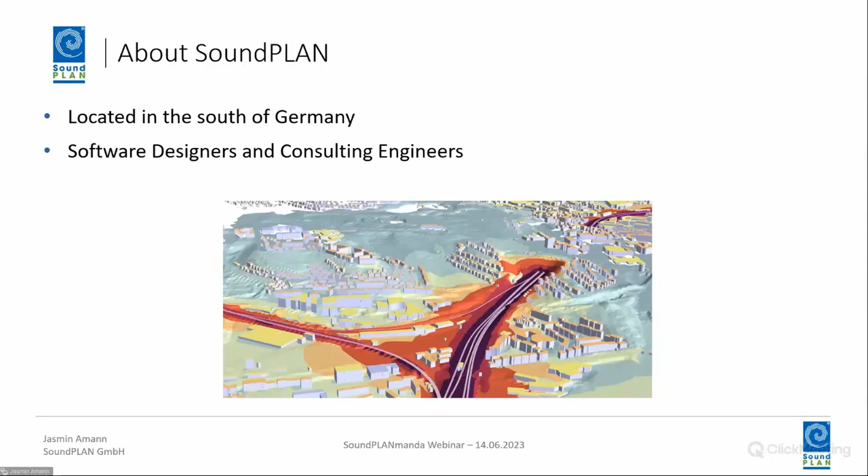SoundPlan offers different software products. First of all, SoundPlan Noise, it's our all-rounder. Then there is SoundPlan Essential, like the little brother of SoundPlan Noise, for beginners. Then we have Saruma, the software for room acoustics. And last but not least, what we are going to look at today, SoundPLANmanda, the mapping and analyzing software in the field of occupational health and safety.

So I would like to give you an introduction to occupational health and safety. It is well known that too much noise in the workplace is harmful. Too much noise leads to hearing damage in particular.

Studies show that high levels of occupational noise are not unique. The problem exists in all regions of the world. For example, in the USA, more than 30 million workers are exposed to hazardous noise. In Europe, 25% to 33% of the workforce is exposed to high-level noise at least a quarter of their working time. In addition, noise-induced hearing loss is the most common occupational disease.

So, what are the problems and consequences of noise-induced hearing loss? It is a result of long-term exposure to noise. The problem is that it is chronic and irreparable damage. This means noise-induced hearing loss cannot be cured.

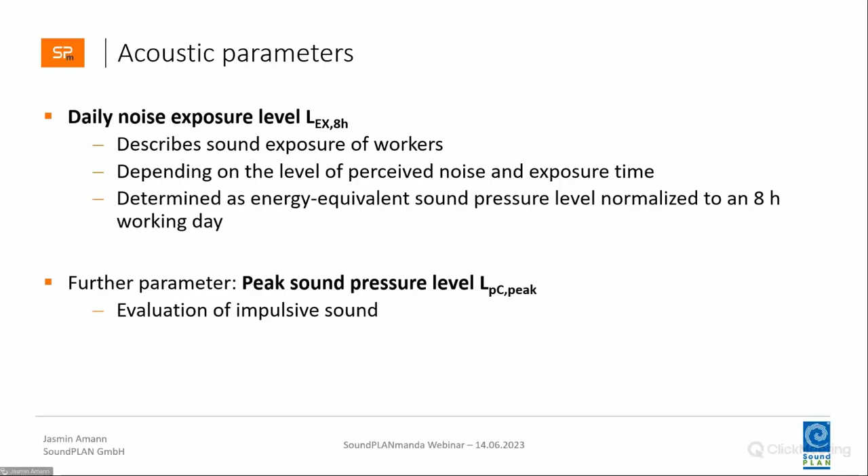So, like everywhere, there are different legal regulations in different countries. For example, in Europe, there's the Directive 2003/10/EC. In the USA, there are some more regulations, for example the Department of Defense Instruction or the National Institute for Occupational Safety and Health.

There are various regulations around the world. Some of them are listed here. And the application of the regulation depends, of course, on the country in which the risk assessment is carried out.

For example, I would like to show you the trigger values of the Directive 2003/10/EC. There is the lower and the upper exposure action value for the daily noise exposure level and the peak sound pressure level. The EU directive also defines an exposure limit value. And if the trigger values are exceeded, measures must be taken, for example the wearing of hearing protection.

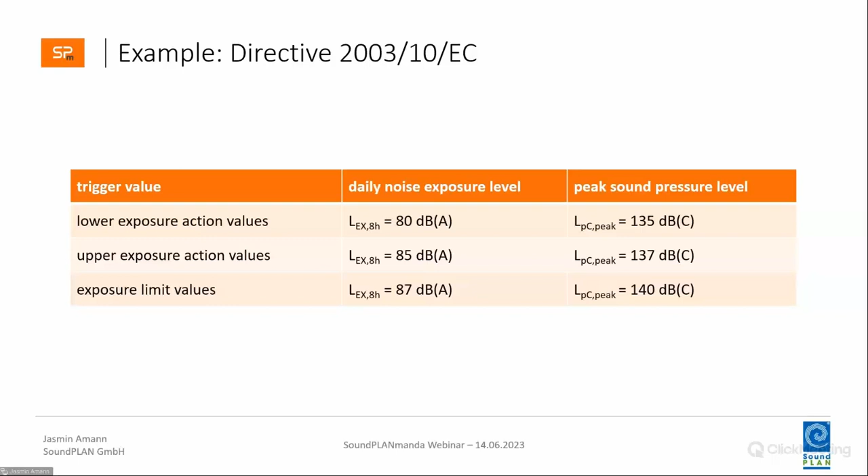So, we have learned so far that excessive noise exposure in the workplace can have serious health consequences. Exposure to high levels of noise for too long can lead to noise-induced hearing loss. Only when it is known that employees are exposed to too much noise can effective measures be taken. There are also legal requirements for compliance with the noise exposure level, and therefore an assessment of the existing noise exposure is mandatory.

So for the determination and assessment of noise exposure, there is SoundPLANmanda, the mapping and analyzing software. SoundPLANmanda is our new mapping and analysis software in the field of occupational health and safety.

The basis in SoundPLANmanda are classical sound pressure measurements. The measurement data can be easily imported and several measurement data can be offset against each other. For example, the mean value from several measurement data can be formed. However, these measured values do not say anything about the noise exposure of an individual employee.

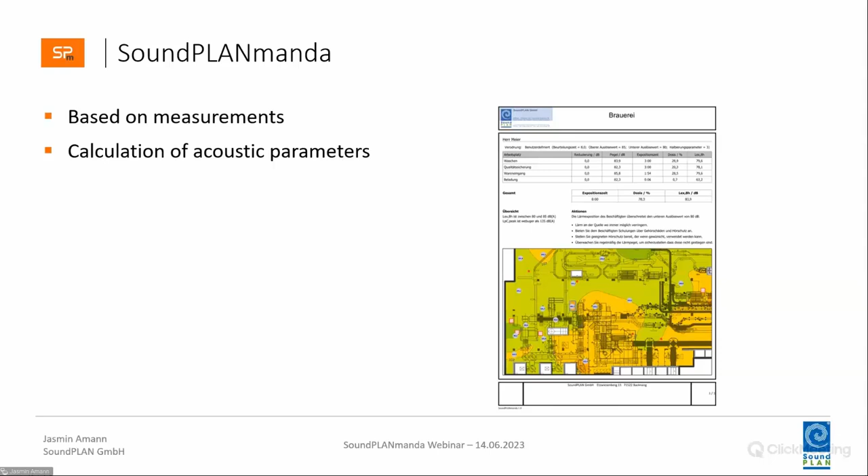Based on these measurements, SoundPLANmanda determines the acoustic parameters such as the daily noise exposure level. The noise level distribution is clearly presented in colored noise maps, and the size of the mapping area is not limited. It can be a small room, a large hall, or an outdoor area.

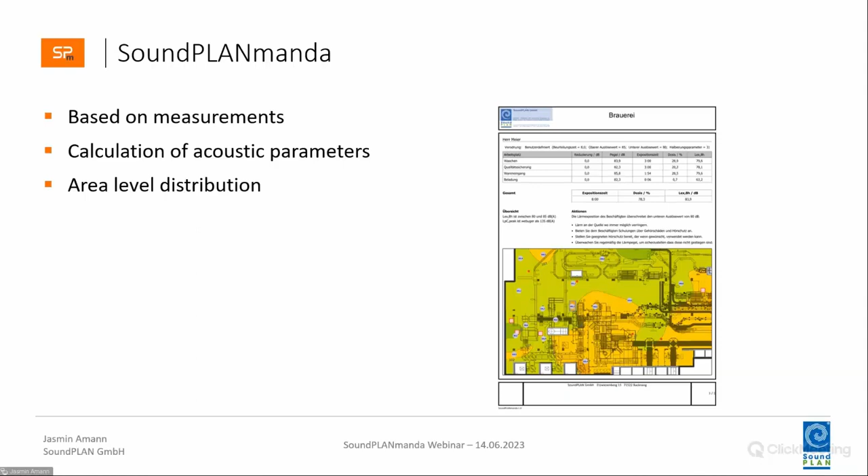SoundPLANmanda can also be used to perform a risk assessment for each individual employee. The risk assessment can be saved as clear documentation and easily presented at any time during an audit. Depending on the guideline used, appropriate measures are recommended for correspondingly high exposure levels and are listed in the documentation.

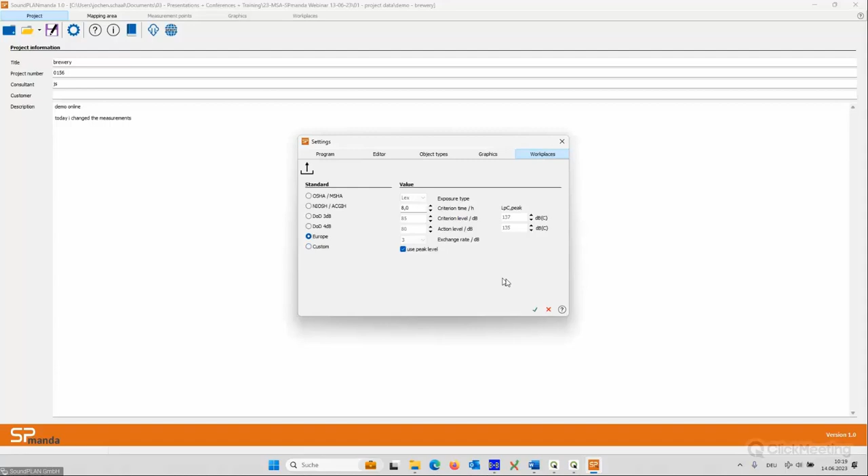So this would be the setting we are using here in Germany. We have criterion level and action level, and also for the peak value, so for the LEX and for the peak value. If you find nothing fits to your setup, you can create your own custom setup and adjust basically all the levels or the settings to what you want to use. So SoundPLANmanda should be usable all over the world if you have different setups.

Then we have the help. Everywhere in the software you can open the help. You can go through the information here in the HTML help. This is also sensitive to where you are in the software. So if I go back to the settings and open here the help, it will directly jump to the settings here and give you information about the settings window.

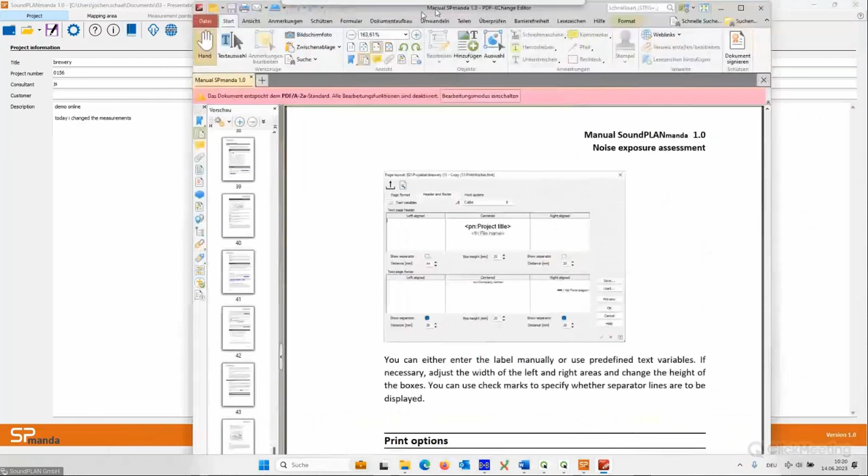Then we have an info splash screen giving you the information about which software version is installed, also the license file and things like that. And the next one would be the manual. So there's a manual available in PDF format. You can load it directly here from the software, read through it, print it, whatever you want to do.

Then we have two buttons related basically to the internet. The first one is updates. So you can check here for updates and news in relation to SoundPLAN. So if there's a new version, you could download it here. Interesting is also the bug fix history, so you can directly see what are the changes that happened in the software over time. And the last one would bring you to the SoundPLAN homepage, where you can find more information about our other software products, trainings, and things like that.

Okay, let's start with the real work. So then I changed the tab sheet here from project to mapping area. And now we have here on the right side our working area where we define the mapping area. Such a mapping area could be any area. It could be inside of an industrial site. It could be outside, it could be one room, it could be a whole industrial building, whatever. So basically you're completely free. It's just defining the boundary area of the mapping.

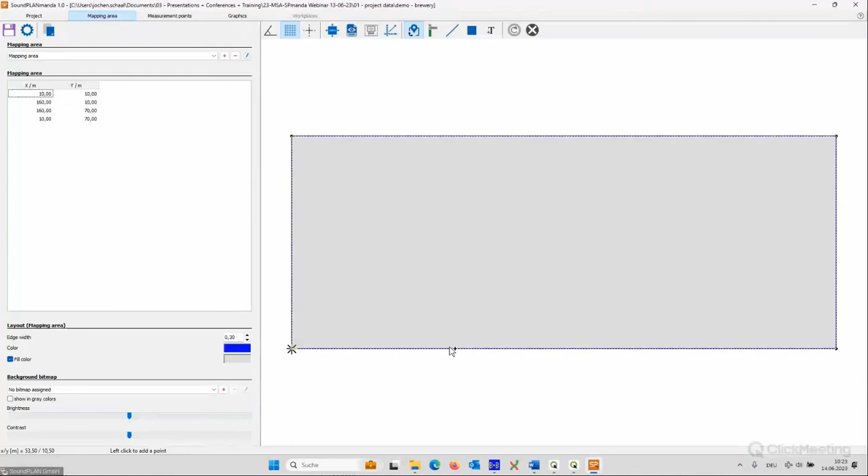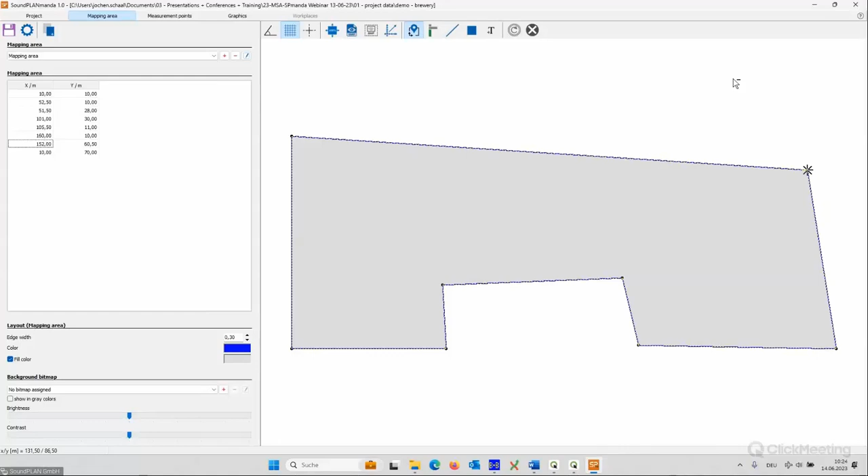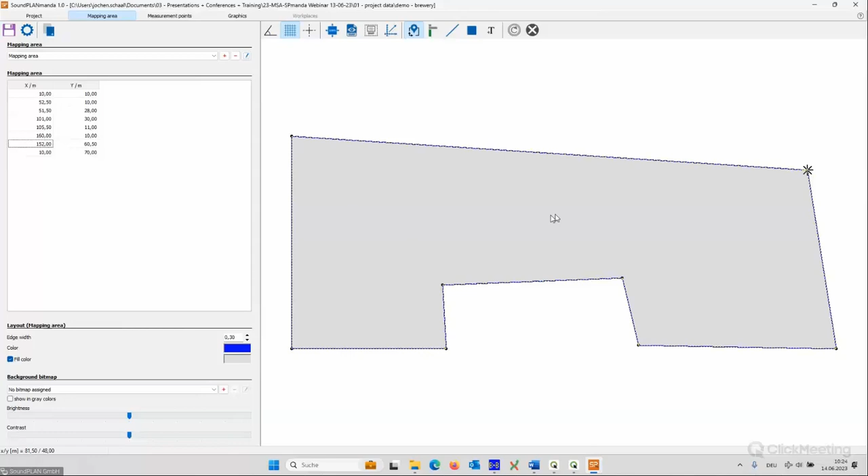You could always add coordinates or delete them if you want to do that. That's very simple. So you just go into the line and say, okay, I would want to have an additional point, maybe another additional point, and now you can start moving them around, add more, and introduce them however you want to do that. Of course, you can also move around the original points. No, that was introducing a new one, so I delete that one. Deleting is also possible, you just press the Shift key, and now you can delete it. So it's very simple to change the layout of your mapping area. And this table with the coordinates helps you to keep track of the coordinates, the values of the coordinates. So you not only have the graphical, but also the tabular information over here.

Then we have the possibility to change the layout. So you can change the width of the border of the mapping area, of the edge. You can do that here by those small arrow keys, or you just use the mouse wheel up and down to change the values of the width. You can, of course, change also the colors. You can either use the predefined colors from SoundPLAN, or you can use this extended function to create your own colors. I will not show that now, so I just use a predefined one for the coloring of the edge line.

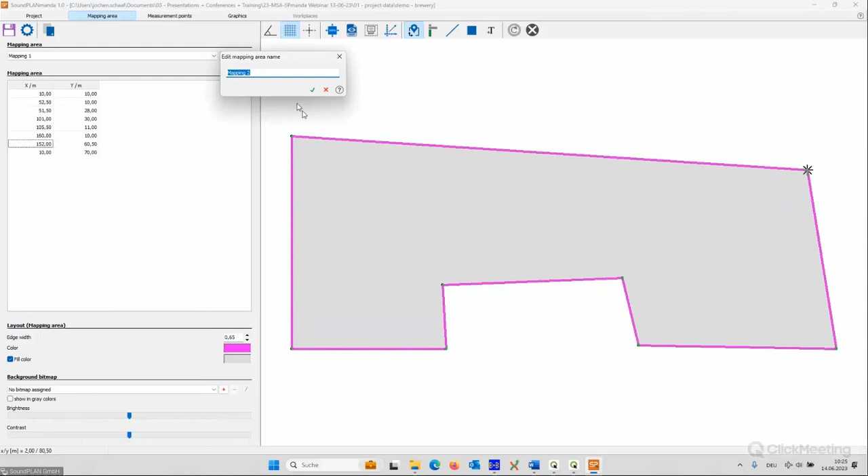Okay, that was the first option. Let's rename it mapping number 1, and then I save it. I create an additional mapping area, because in SoundPLAN there are no limitations. You can have as many mapping areas in one project as you want. So now I have a second one, and of course I have to enter the border lines as well.

To do that, I can use, for example, the grid mode. Okay, there it is. I used a very large coordinate range, so that's the reason why it took a while to show the grid. If I digitize now with the left mouse button, it will always catch such a grid point.

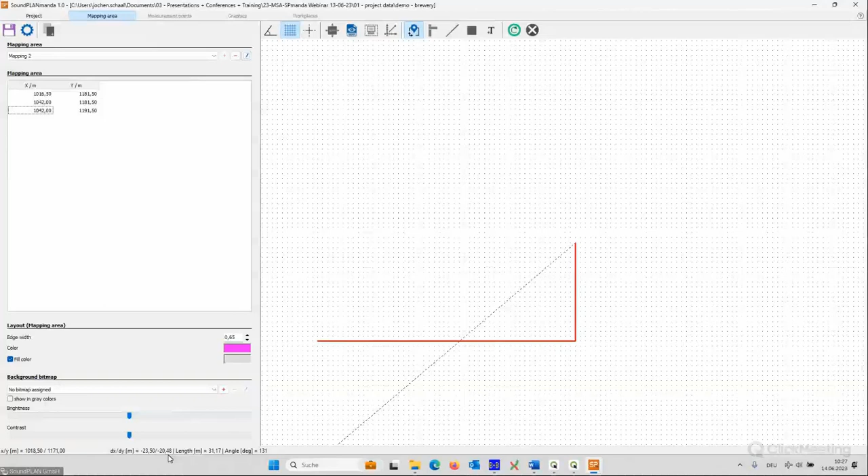Like this, it's very easy to define rectangular structures. Together with this information up here in the lower left, you can see the distance to the last point. So now the distance is 10 meters. Left click, I go upwards, and again 10 meters. Like this, it's very easy to digitize here in this grid mode.

But we not only have the grid mode, we also have angle mode. Now you can see I can only move in 15-degree angle steps, which I defined in the pre-settings, which makes it very easy to define the building or the shape of the mapping area. Together with this crosshair, I can also find other corners. Left click, and then maybe go down again, and then like that.

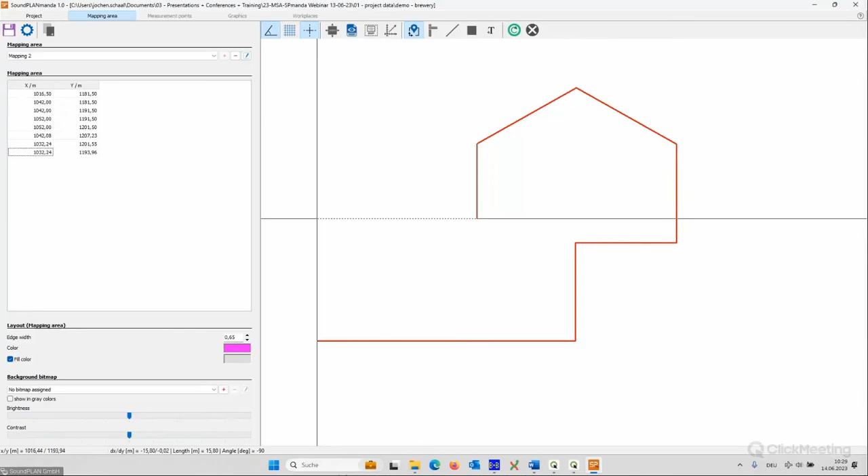Then you might want to place the last point and finish the input of the object. Then, as you have seen already, I moved in and out with the mouse wheel. Very easy. When I press the mouse wheel, I can move around. If I'm sometimes lost, you just click here on fit in, and it will fit the geometry into the screen.

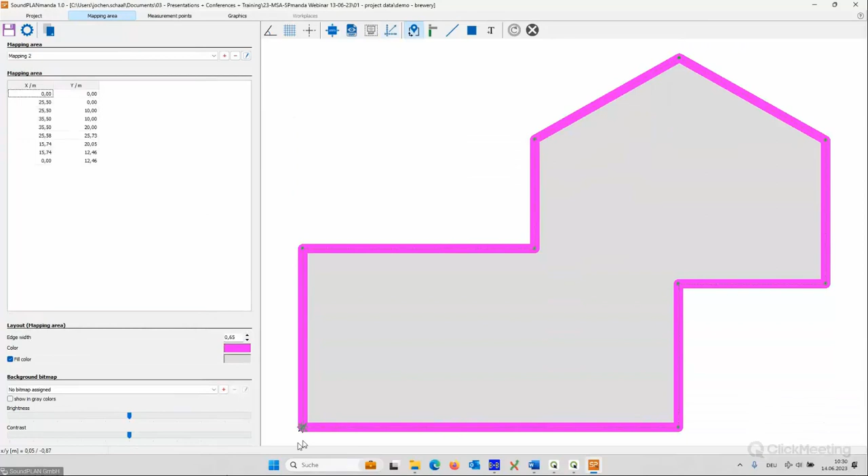Now I would like to show another function. At the moment this lower left corner is at 1016, 1181, and I would like to change the coordinate origin to 0, 0 for this point. We have a function for that, change 0. I just click here on the corner point, and you can see now it's 0, 0. Now it's much easier for me to define points afterwards inside the mapping area, which I have measured in the distance from this lower left corner point, for example.

Okay, let's continue to the last possibility for how to create a mapping area. Mapping number 3, I guess this is the most common approach. Now we will load a bitmap into the background and digitize the border of the mapping area on the basis of this bitmap.

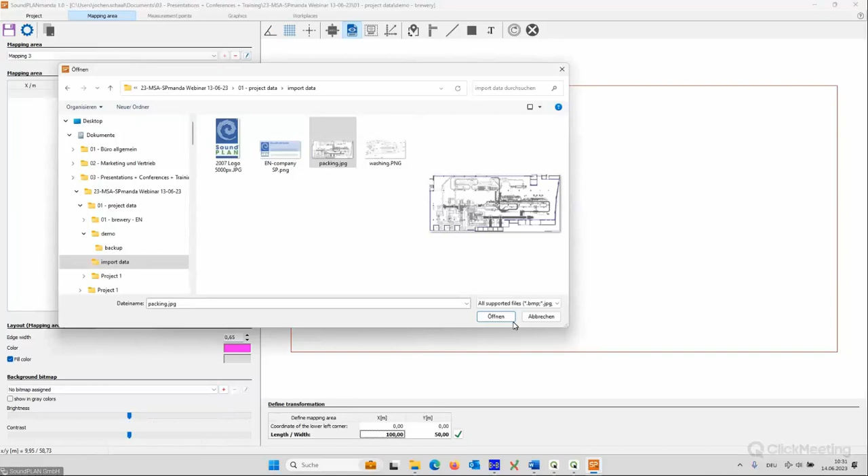So I press the button for the bitmap, go to a folder where I have some bitmaps, okay, select it. You can use JPEG, bitmap, PNG, TIFF, or PDF files. I already have a JPEG I want to use. I open it, and of course now I have to introduce some scaling, because otherwise the program will not know how many pixels is 1 meter.

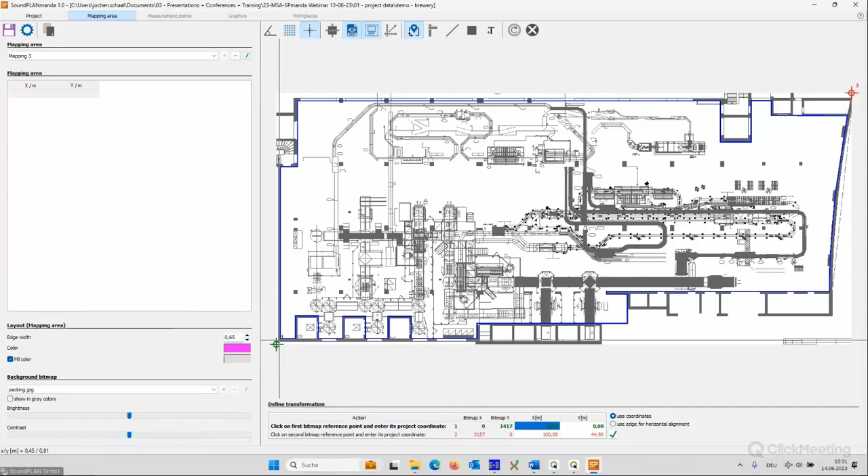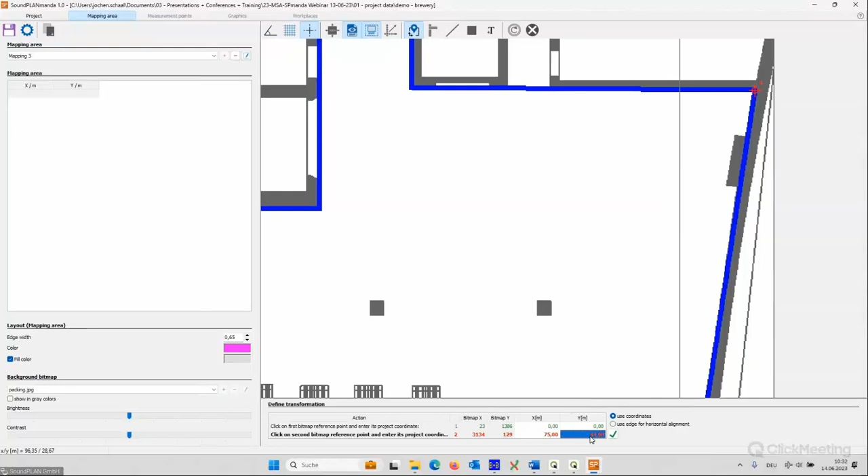To do that, I have to georeference the bitmap, and for that I have to know the coordinate information of some points of the bitmap. I have measured, or I declare this corner point down here to be 0, 0. Then I take another point, which I have measured in the bitmap, or know from the map up here. I know the distance from the lower left to this one is 75 meters in the X direction and 30 meters in the Y direction. So I've created now those 2 points to georeference the whole bitmap. If I press now the green tick mark, I accept the transformation.

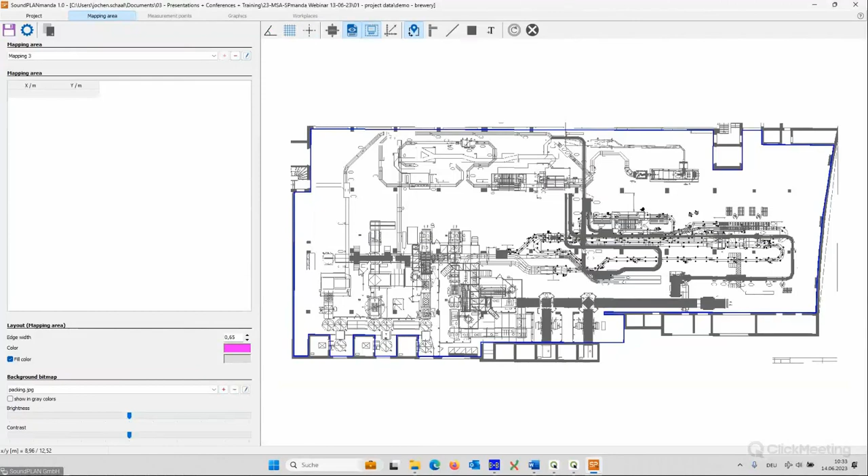Now if I go down here with the cursor, you can see, yeah, here it's round about 0, 0, and up here it should be 75, 30. Now I can introduce the border of this industrial hall. So I will start down here. Okay.

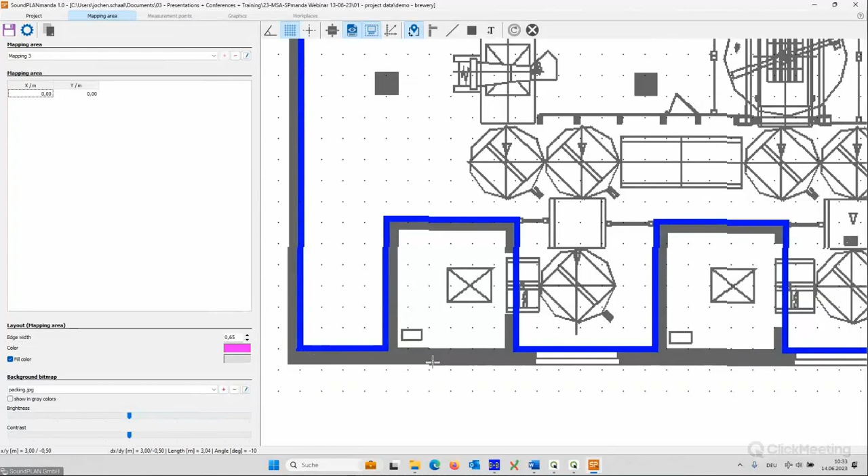And I will use the grid to snap to 0, 0. Okay, first point. And then I can snap the next point down here. Fits quite well, that fits also. Remember, I have just a 50 centimeter grid, so it will not always fit like here.

It doesn't match anymore. And then I just switch to the angle mode and continue to digitize the border of the room.

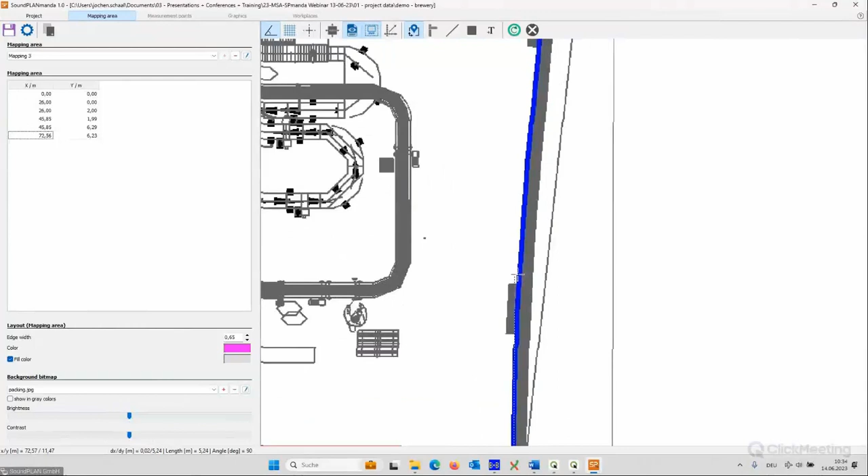Okay, now I'm still in the angle mode, and now it gets a bit tricky because I have the 15-degree angle mode, and it will not be possible to digitize this wall.

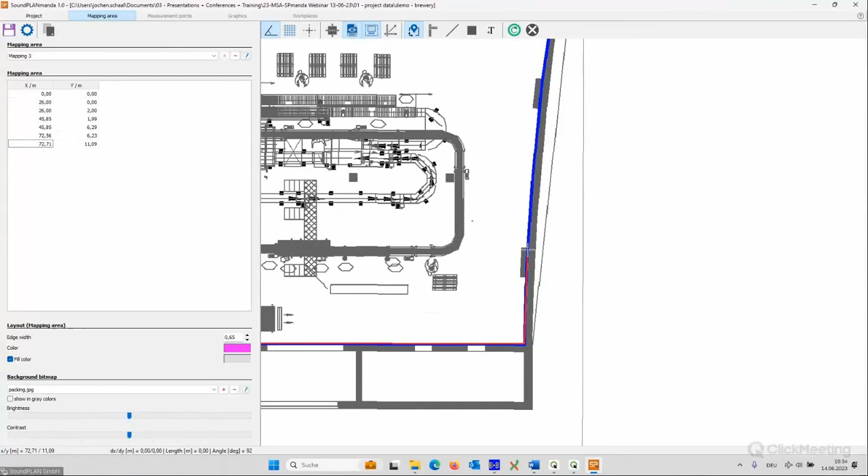So I could switch off the angle mode up here, but to make it easy for you as a customer, you can also press the Control key, and then it's temporarily switched off, and now I can follow the line here without the angle mode.

Oops. And now I release the Control key and I'm back in the angle mode, so only 15-degree steps are allowed.

And with a double click, it will close the mapping area. Okay, so very simple to define such a border.

Let me look if I forgot something. Oh, that looks okay, looks good. Then we have some options for the bitmap.

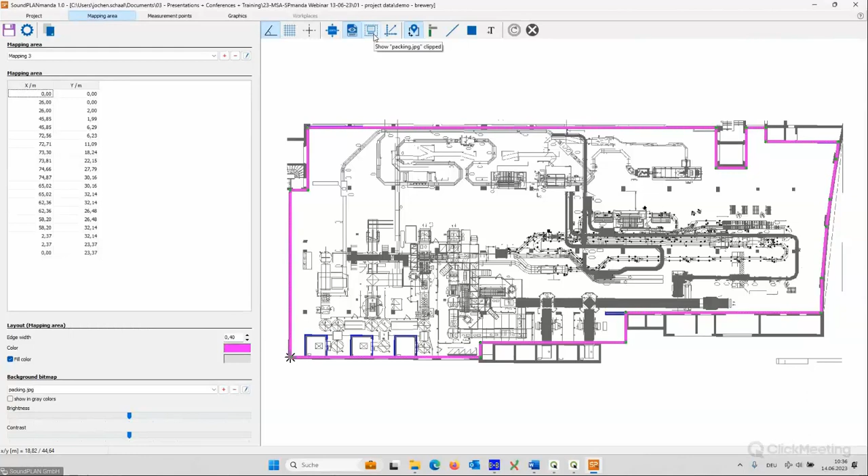I can hide it or show it. And at the moment, the bitmap is clipped to the border of the mapping area. If I want to see the whole bitmap, there's also a button to do that. I prefer to clip it. Okay.

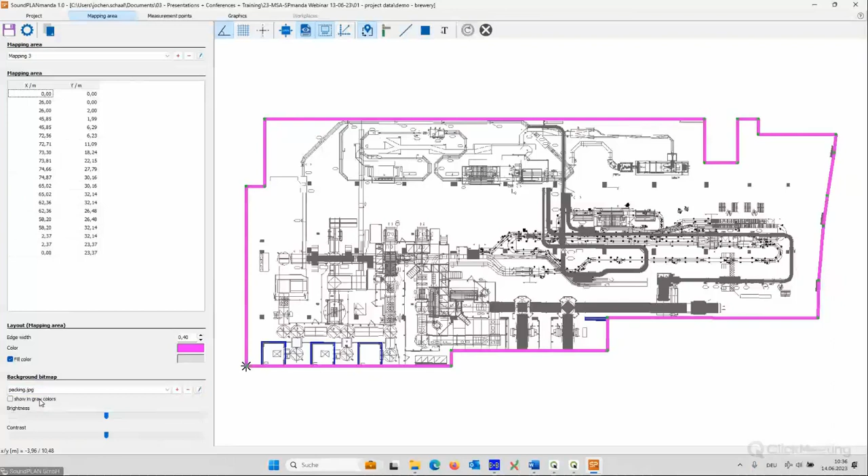Now, one last thing to say about the bitmap: you can change the appearance. You can show it only in grayscale. So I have a colored bitmap, you can see here some blue lines, but I only want to see the bitmap in grayscale, so I do that. And also you could change the brightness or the contrast. I will not adapt that, that fits quite well to my needs.

If you want to, you could add additional bitmaps, so you are not restricted to one. You could have multiple bitmaps you can load and use in your project. You can just add them here with the plus.

If you are unhappy with the georeferencing, the coordinate definition, you can change that later on by pressing this button and change it and do the georeferencing for the bitmap once more.

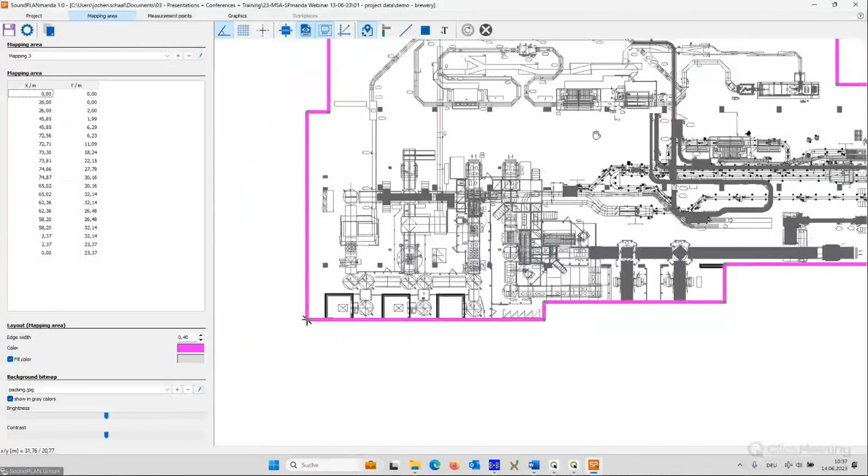Okay, now we want to introduce some additional walls inside the room. So for example, down here I have some separate rooms. I select here the object type wall. You can see here in the lower left corner, we have now the setup or layout for the wall. And defining such a room at the border of a building is very simple.

You just go to, for example, your upper left corner, press the... sorry, my fault, I delete the object. Yes.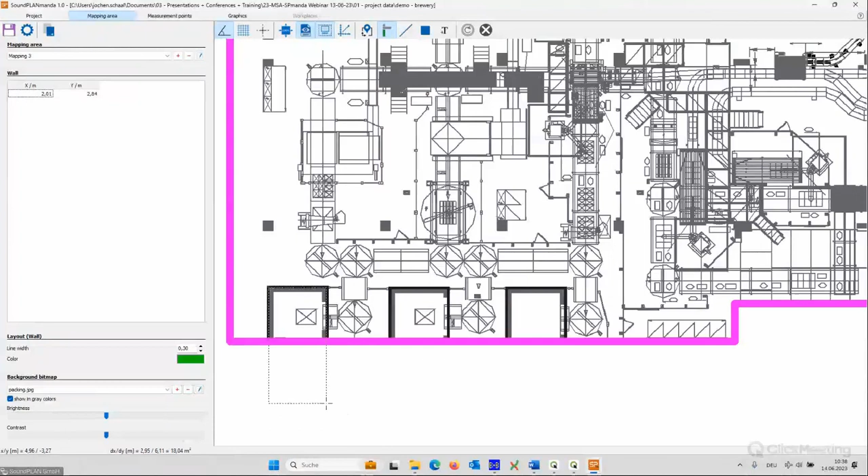Press the left mouse button, keep it pressed and pull open a rectangle, and then release the mouse button and it will clip the wall to the border of the building. So very simple to do that, you do not have to digitize all the points. Just pull open a rectangle and you will have such a basically closed room.

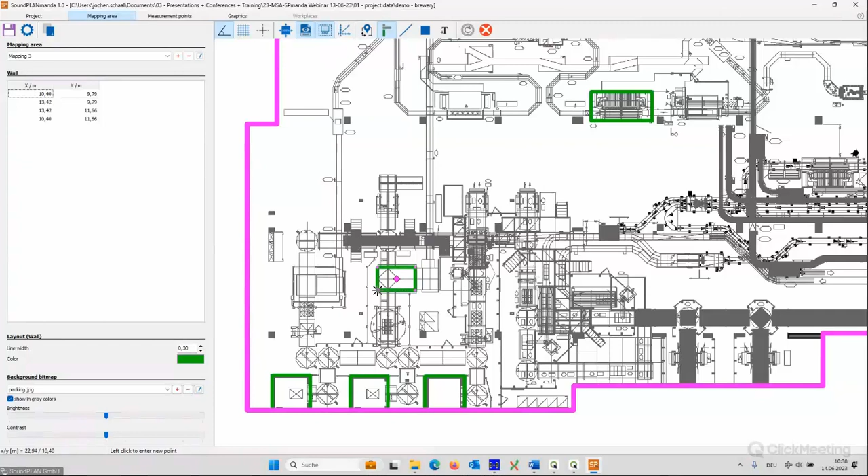Then you could say, okay, there's some large machinery inside of the building that I would like to consider also, to break up the noise field basically. So, for example, maybe this one, let's say that one as well, and maybe we have another one over here. But that's something you have to decide yourself when you did the measurements in the room.

And a last thing, I want to introduce here a wall freely standing in the room. So first point, second point, third point, and fourth point, and then I close the wall. So you can have, those walls can have 2 points, multiple points, can be a closed structure, whatever you want.

So that's all for mapping relevant objects, I would call it. Then we have also the possibility to introduce lines and areas just for graphical information.

So if I say, okay, I want to highlight maybe a certain line, I can digitize it here, and it will be displayed later on in the graphics and graphical output just for display purpose. So it will not influence the definition of the noise field.

Then we have an area object, so we could introduce up here maybe an area. I don't want to have a fill color, but maybe make the border a bit thicker and a different color, and introduce here a text inside. That seems a bit difficult - last time it worked without problems. So I place it here and call it rest area.

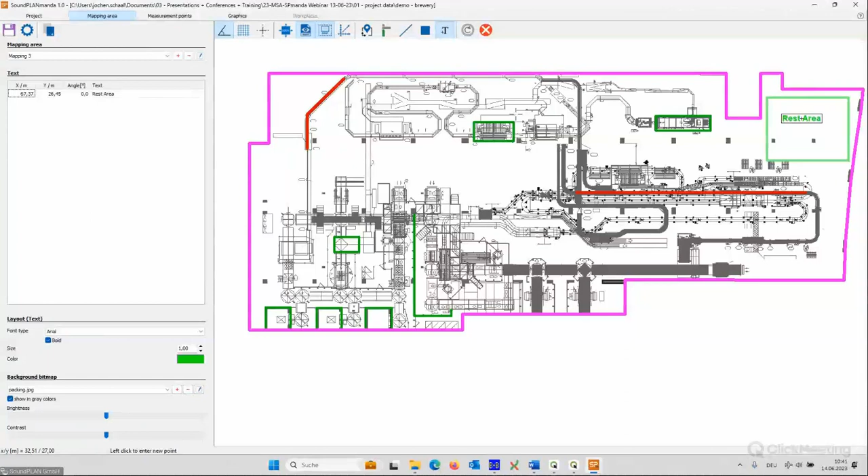Move it inside here. If I want to change the font type or make it bold, you can do that. Also change the size of it, and of course also the coloring. So maybe I use the same color as for the border line. Like that, you can create the interior of your mapping area - in this case, it's an industrial hall.

When you are finished with that, you continue to introduce your measurements, your measurement points. So we go on to the tab sheet measurement points. It creates automatically a measurement file where the measurements are stored. We can have multiple measurement files, not only one in a project - might be helpful if you did measurements during different days, or if you have measurements for different mapping areas.

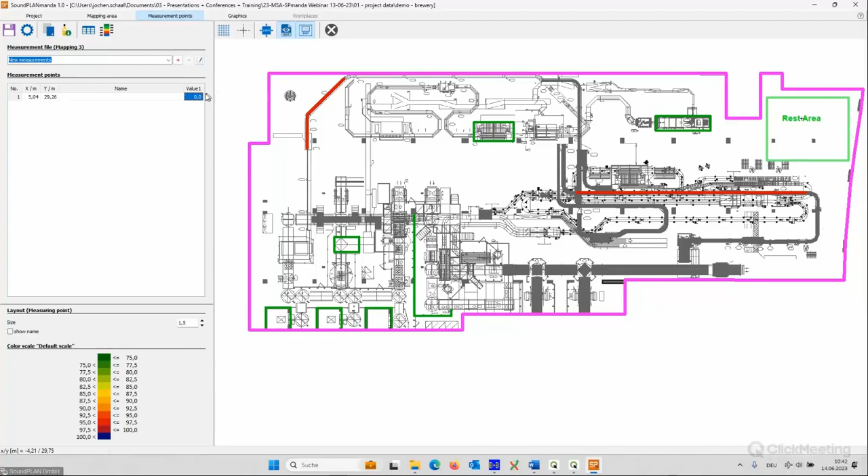So let's start. Let's assume we did some measurements, and the first one we did over here. I just left click and say, okay, value - let's say we measured 90 dBA. And then it colors the whole room with the color for 90 dBA, using a default dBA scale, which can be adapted to your needs, but that's the default.

And of course, then you should do multiple measurements in such a room. So for example, if we did the measurement over here, let's say we measured 85 dBA. Then it tries to color the room with the second value. But for such a large room, especially if you've introduced structures that break up the noise field, you need much more measurements. So let's say up here we have 95, and like that, you create the map for the measured room.

And also maybe 88. Well, this is how you can enter the values manually.

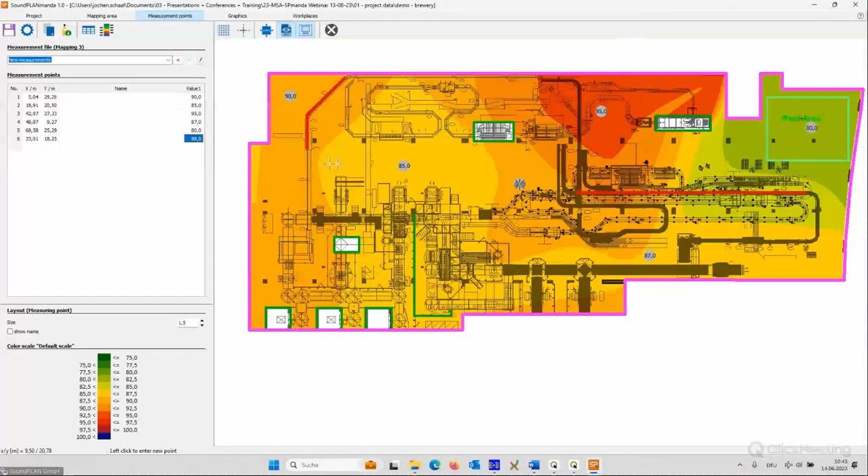It's helpful that we can see the cursor coordinates always in the lower left corner, so we can find the position of our measurement point. We can use the grid again, so you can snap to the grid, which might be helpful. And remember, in the settings, you could change the grid size to a smaller value than the 0.5 meter I'm using here at the moment.

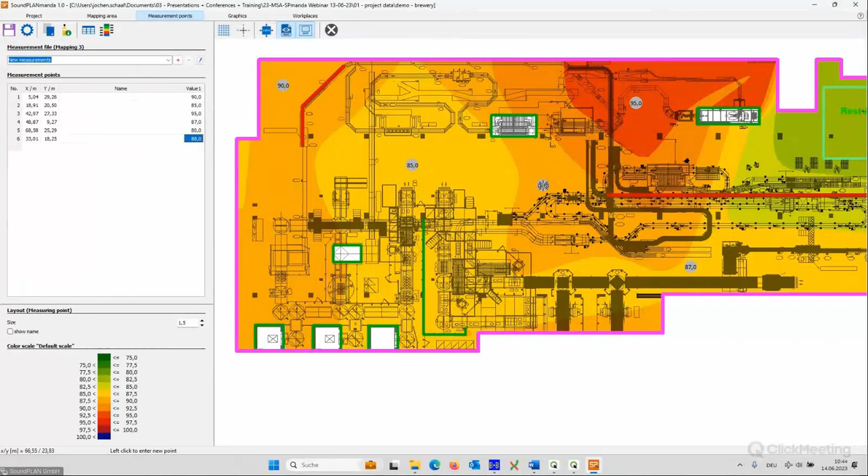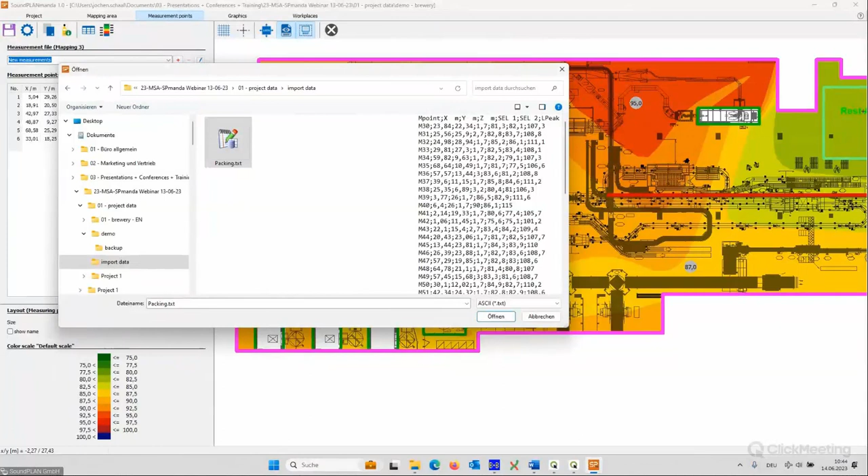But there's another possibility to make it easier for you - you can also import measurement data. We are importing simple text files, plain structure. The first line can be a kind of header, and then semicolon-separated measurement points, what you can see here in the file.

So we have a name, x and y coordinates, a height coordinate for the measurement point, and then 3 measured values - SEL1, 2, and an L peak value. Such a file you could generate easily in Excel. So if you did the measurements and documented them in Excel, you could export it as a text file and then load it into SoundPLAN manda.

So I open now this text file. There's also a preview again, so you can understand the contents of the text file. So we have a header, number of title rows is 1. And then we have to assign the columns of the file to the information in SoundPLAN.

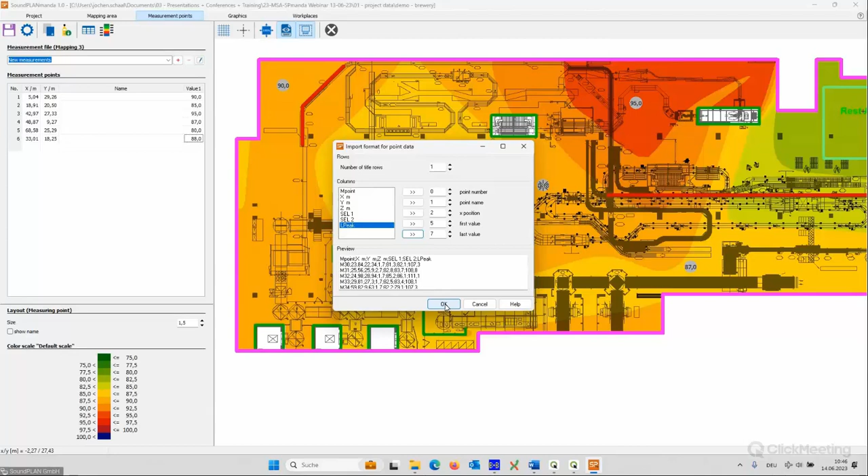So we have a measurement point name, which we assign here to point name in SoundPLANmanda. Then X position is column number 2. And the first value is SEL1, and the last one is column number 7. So very simple to assign such measured values to the structure in SoundPLAN. When I press OK, it has imported the measurement data.

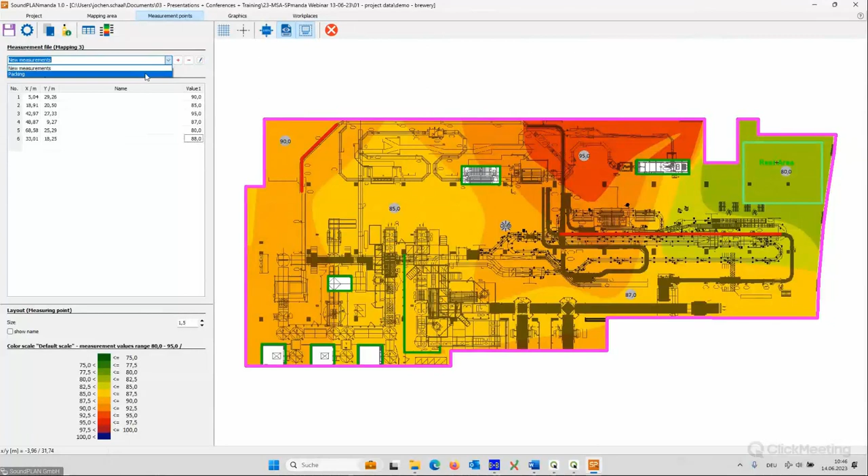You can see it has created an additional measurement file. That was the one we entered manually, and now there's a second one called packing, which is the name of the text file. So it used the name of the text file as naming.

And this is the result for it. Now you can see it gets a quite nice noise field for the room. I think you shouldn't measure too few numbers of measurement points, like this you can get a nice looking picture, so you need quite a lot of points for such a large room.

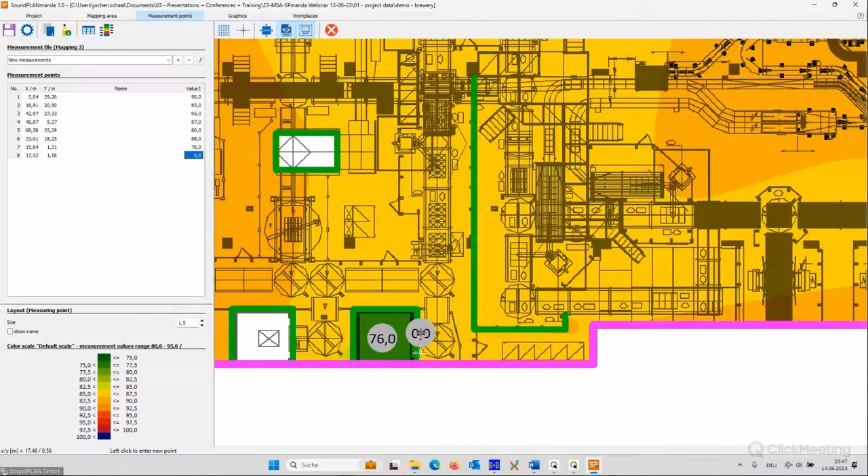One thing I'd like to show, if you have such an enclosure, and you might have one here too, let's go back to the other one. I don't want to destroy this one. If you have a measurement point in here, and let's say you measured 76 dBA, you can see such a wall is really breaking up the noise field. It's just coloring inside here of the enclosure with the 76, and the rest outside stays as it was before.

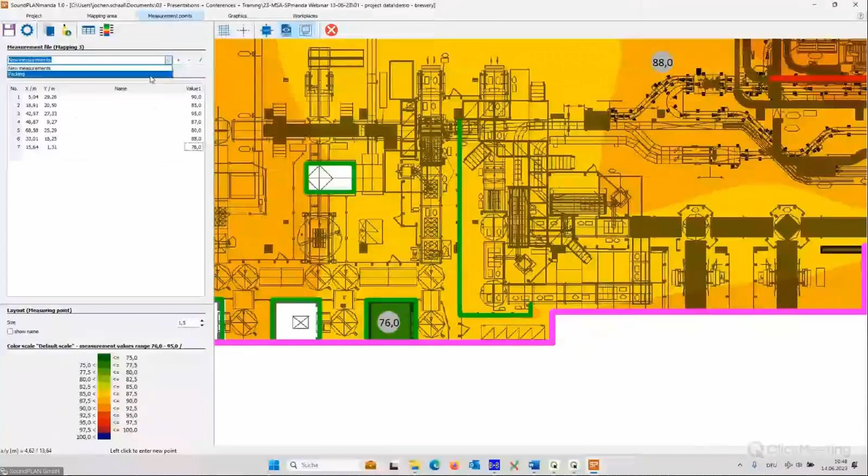Okay, let's go back to the imported measurement file. So what do we have? We have imported multiple measurement points with names which came from the measurement file already. Then we have imported 3 values representing 3 different measured values: 2 LAeq values, SEL1 and SEL2, as they are called in the measurement file, and a peak value.

For the SEL1 and SEL2, the default scale makes sense. For the peak values, which are much higher, the default scale doesn't make sense, so I might want to change the scaling. I can do that. Let's say we start at 90 and use 2.5 decibel as interval.

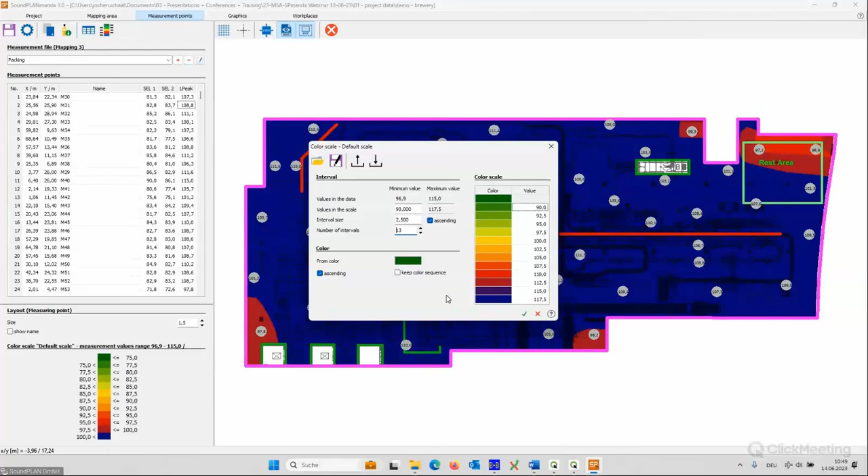Well, the rest seems reasonable. If I want more than 12 intervals, I can change that too, so now I would have 13, and it automatically sets the colors. Of course, you're completely free, so if you'd like different colors you just left click here and choose... now I did it, should change the color. So now I should not overwrite the default scale, but save the new color scale as, let's say, peak.

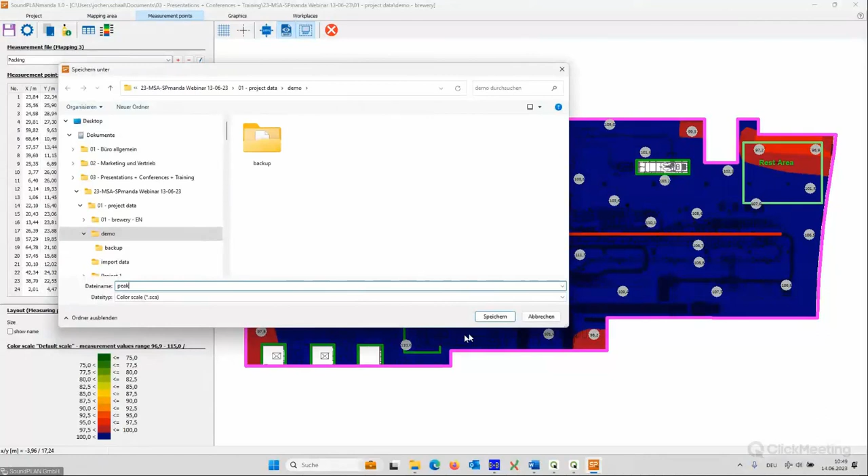I can see here we have a color scale peak, which is assigned to the column peak, and for the other ones it's still using the default scale. For SEL1 and SEL2, it's still the default scale. And if I go to the peak values, it's using now the new color scale peak.

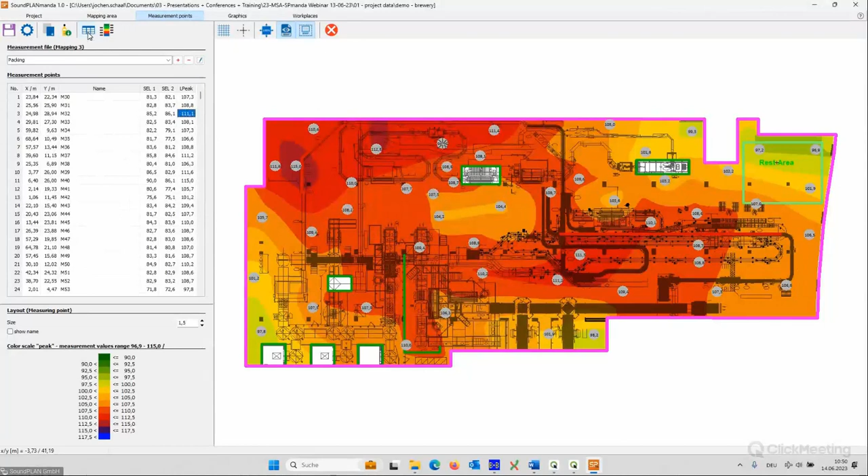Okay, let's dive a bit more into the table structure here. If I click on this button, I can edit the measurement table setup. You can see we have by default always a number for the measurement points, X, Y, Z, and the name. These are default columns, I cannot change them or delete them.

And then I have the imported SEL1 and SEL2 and the peak value. Something's missing because the software doesn't have the information yet, which is the unit. So I could enter here the units. The peak is measured in dBC.

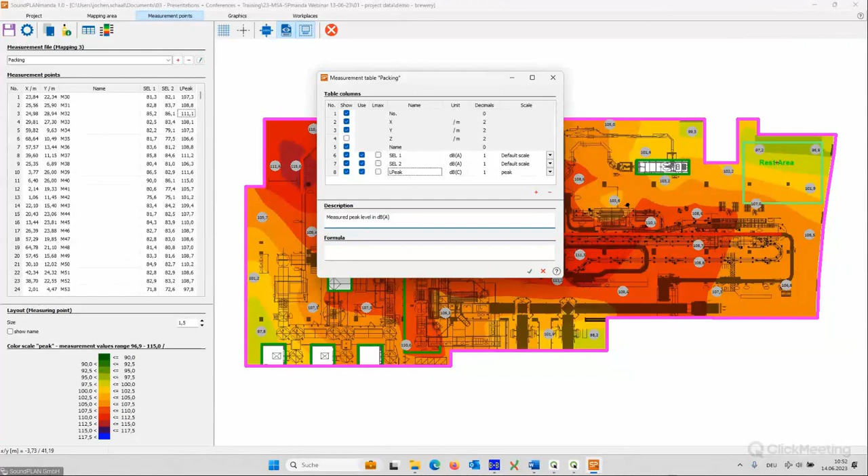The description is, of course, measured sound pressure level SEL 1, dBA - this is the description. And I can do that also for the others. Control C, next one, Control V, and for the peak. If I do it like this, all the info will then be used later on for the output, and it will automatically use the right unit, the right description, and things like that.

There is another option, you can add additional measurement values. For example, you could say you'd like not just to enter values, but to calculate values. So for example, if I want to calculate the mean value between SEL1 and SEL2, that's no problem, you can do that here. So I call it Leq.

And how to do that? Basically you can enter down here in the formula any type of formula you can imagine. The only thing you have to know is how to refer to other columns, and that's done in SoundPLAN by using X6. So X6 is for column number 6, and X7 column number 7. So I calculate the logarithmic mean value of SEL1 and SEL2 by introducing this formula. I was too lazy to write it, so I copy pasted it, makes it much easier.

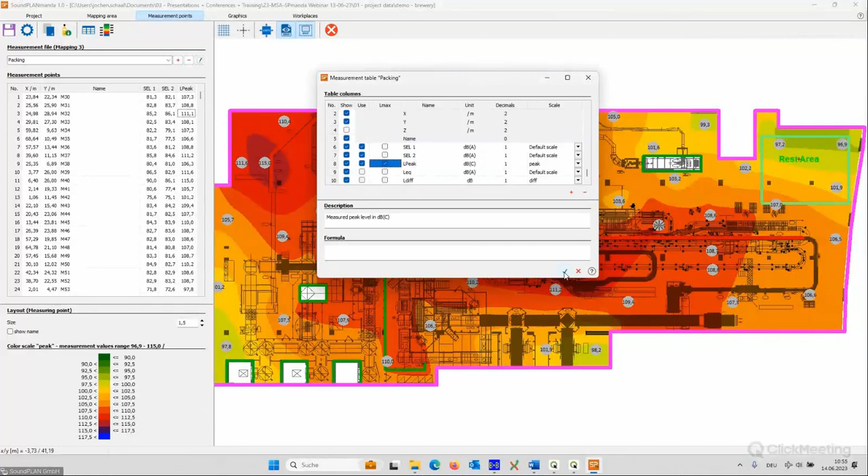And now I've got two additional columns here, Leq and LDiff. This is the mean value between SEL1 and SEL2. And then we have the difference between SEL1 and SEL2.

And it's unfortunately using the wrong color scale, so that didn't work. Let's try to do it again. Maybe I have to... yeah, now it's okay. Now it's fine. So this would be the difference color scale from -2 to +5 dB.

And you can see now the difference between two measurements, SEL1 and SEL2. So like this, you are preparing your mapping area and introducing your measured values. And as I showed you, if you want, you can also use formulas to create new results you can display, and of course, later on, print or export.

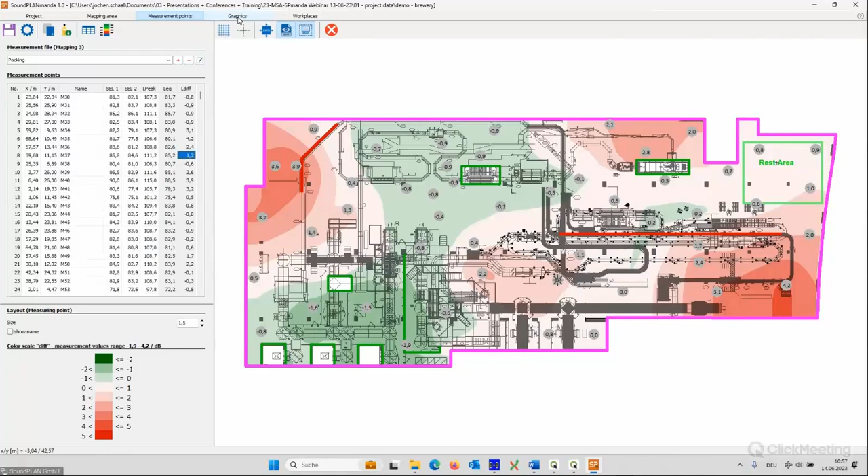Okay, let's go further on to the graphics, which is the first tab sheet for documentation. Here in the graphics, you see all the sheets we have. Basically, for every value, it's creating a sheet: SEL1, SEL2, LPeak, LEQ, and the difference level.

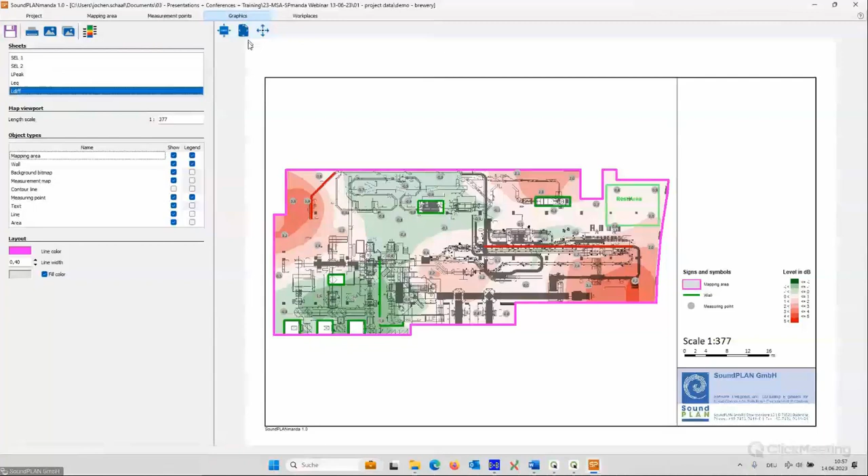And you can see already it automatically creates such a map. I chose A4. There are signs and symbols for the display, there's the scaling. The scale of the map is not very good, it's 1 to 377. I could change it graphically, of course, but it's more convenient to change it numerically. Now it has the scale of 1 to 400, and it introduced automatically my company logo.

For each of the maps, the sheets, I can also introduce some descriptors. So if I click up here in the upper right area, I have basically a title and some text, a text field. So if I introduce in the text field the title, and then I have the text, I can enter manual titles or texts, but I can also use text variables.

For example, I could have here the project title, and maybe in the text field I would like to have the mapping area, which mapping area is displayed, and maybe which measured value, together with the description.

Now, it has to break, of course, the text because the field is too small. If you want to change that, this is possible as well.

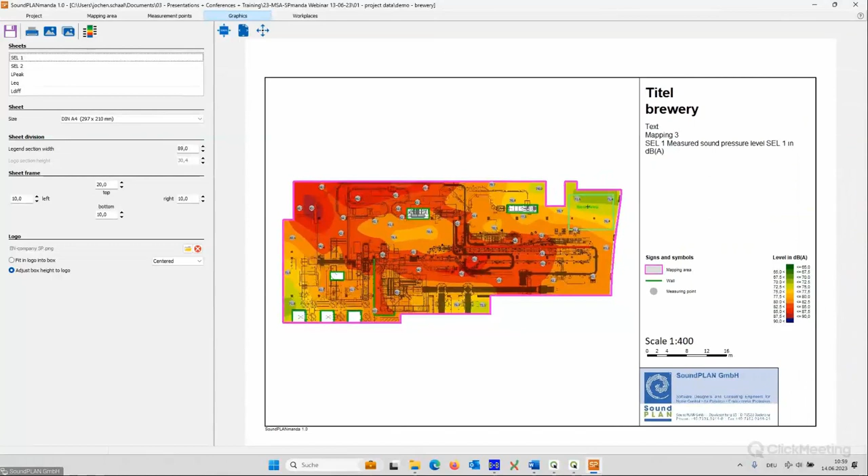Now I don't... somewhere it... okay, I think it's here. You can change the size, could make it bigger if you want to. If you don't like it too big, just stay with the width, and maybe adopt down here the size of the text.

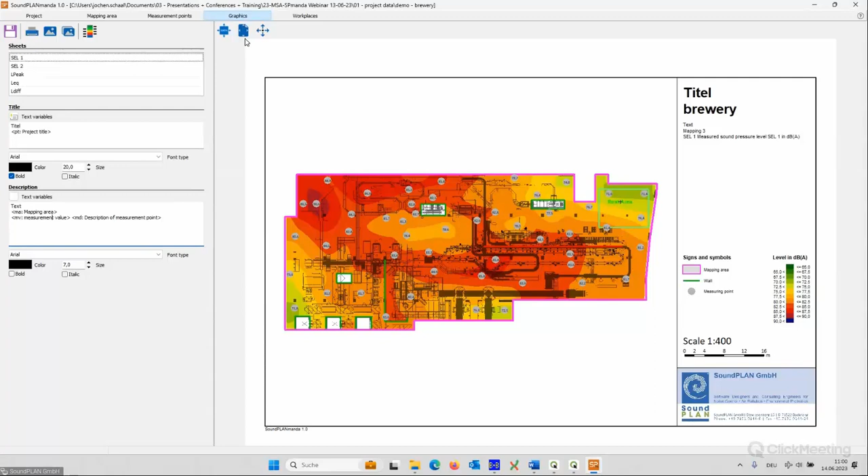If you are happy with the layout and the setup, of course, you could also decide, well, measurement points is nice basically to see, but I don't want to have them in the output. No problem, you go here to the object types, measurement point, show it, no, and of course in the legend it should not be shown as well. And then you could print it like this.

If you want to stick with the measurement point and maybe even get some more information for the measurement point, okay. That's not nice, the edge color, what's going on here.

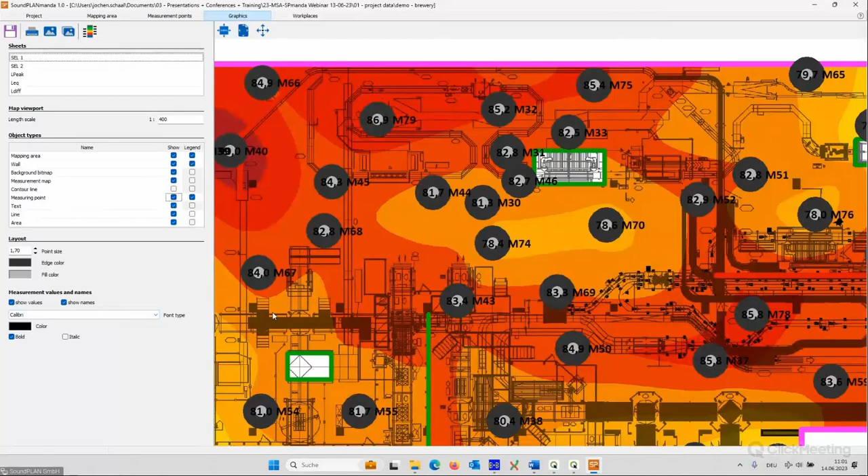You could also show the name. So now the name of the measurement point is displayed, and could print it like this.

Basically, you can adopt all the different objects that are displayed over here in the map, and you can change the measurement map, for example. No, so where is it? Measurement map, the back one.

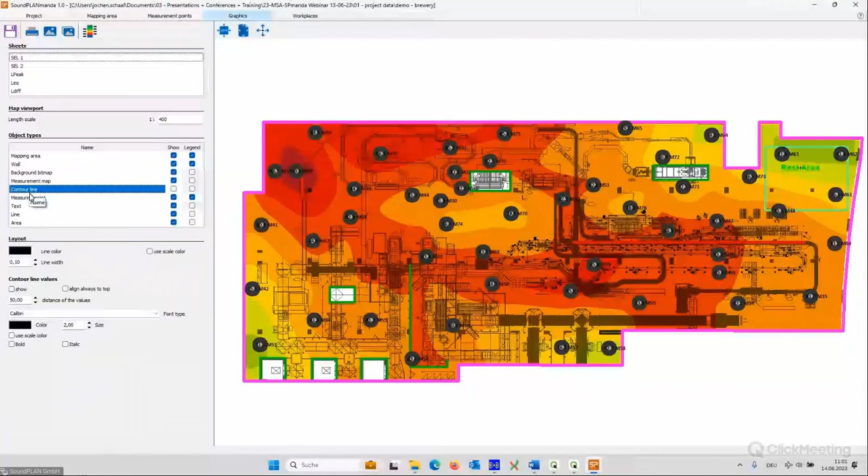The contour lines - at the moment I'm not displaying them, but you could switch them on if you want to. The switch is over here. Now they should be shown.

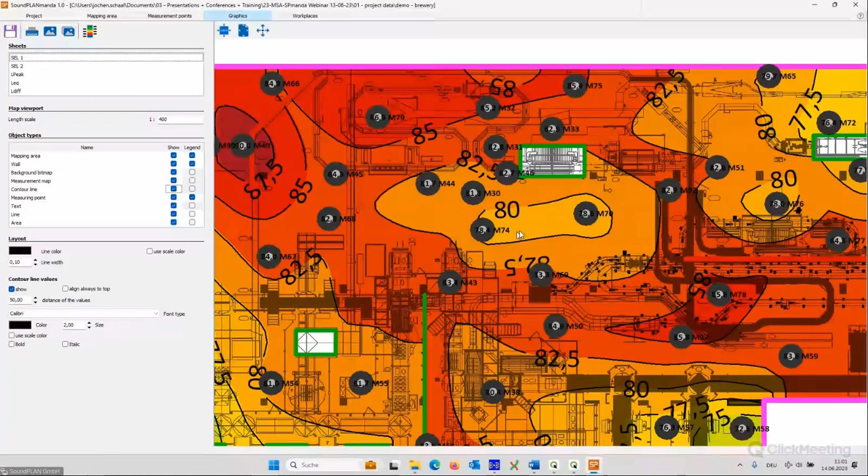I could also have text with the inscription of the dB value or the level value displayed, and you can change the size again - if it's too big, just make it smaller. So you have a lot of options for the display; there are not a lot of limitations. You just have to change them however you want to use that.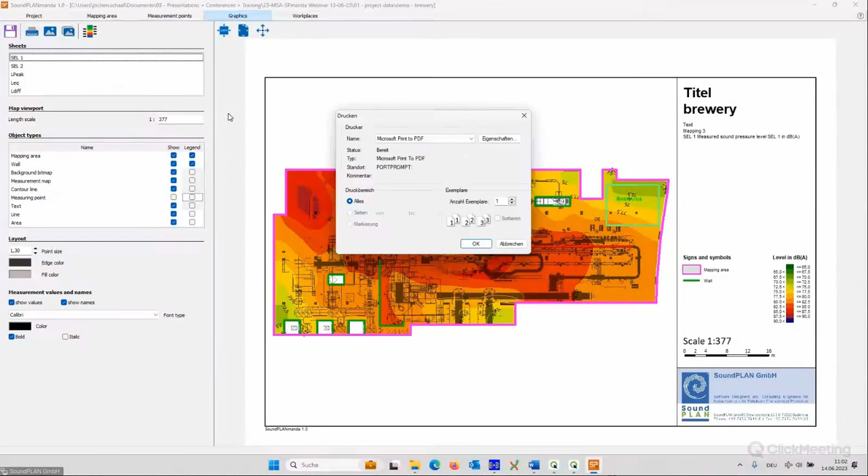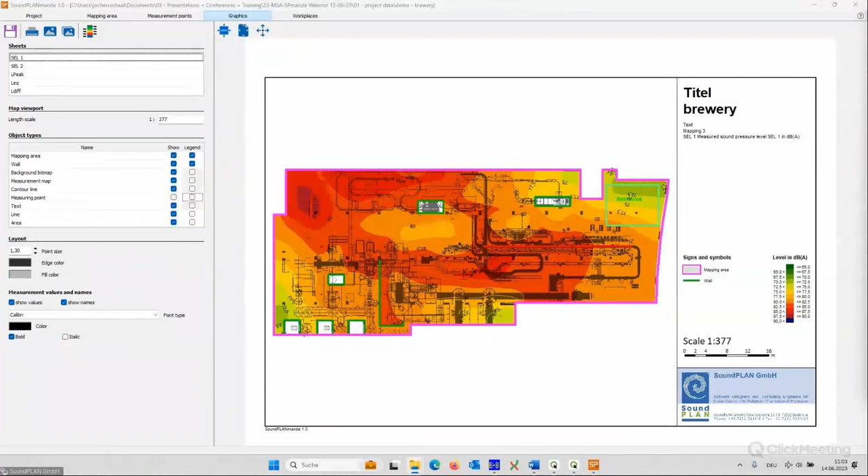If you're happy with your setup, you can print it. Let's find it - here it is. So this is the printed PDF.

You could also export it or save the sheet as - save it in a graphics file with options for resolution and color depth. The last option is to copy the current sheet to the clipboard, and then you could introduce it directly into a report in Word or PowerPoint or whatever.

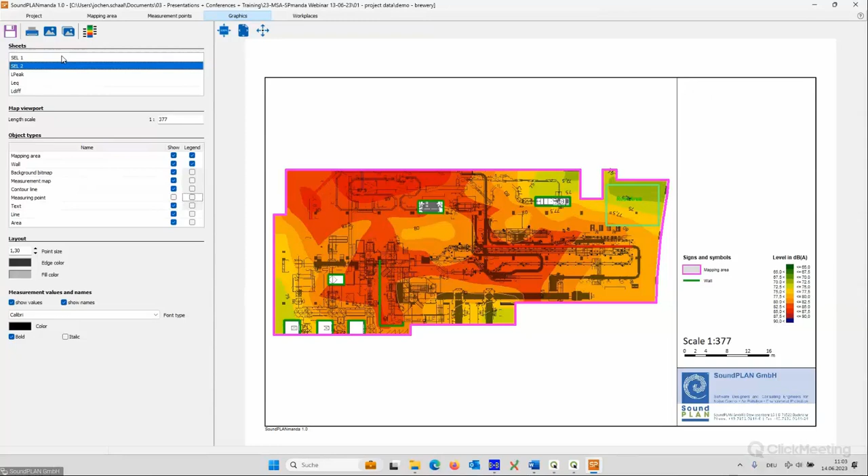So I showed you that now for one. You could also multi-select up here in the sheets - now you can see all of them are red, and they will be printed all at the same time, or you can save all the sheets at the same time, which makes your work easier and more convenient.

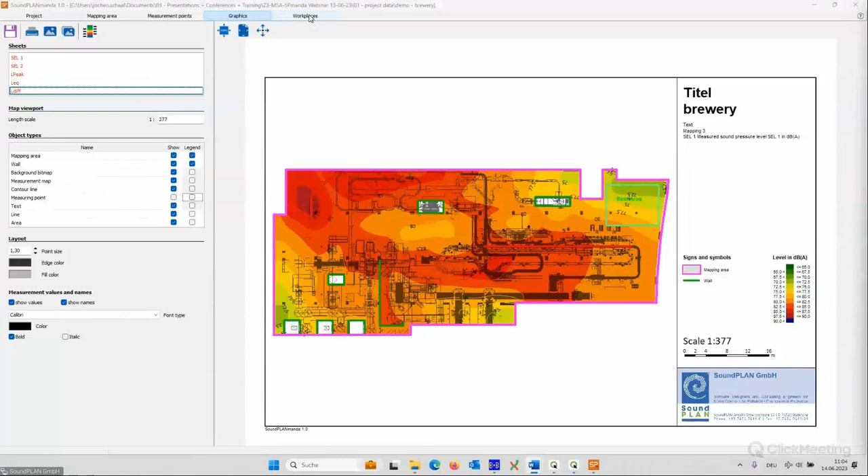Then I go on to the last tab sheet, the workplaces. In the workplaces you do the assessment of the workers. I chose here in the settings the European assessment with an exposure level and the peak level, and in the settings of my values I selected SEL1, SEL2, and LPeak for the assessment - so they will be used here.

What you can see here in addition is that it automatically created the first worker, but this worker has to work at a certain position, and this is what I can do now down here in this mapping area - if I want to, I can show the measured values again.

Maybe that's sometimes helpful; if you don't need that, you just switch it off. I'll leave it on. So this worker number one, let's call him Mr. Müller, is working here.

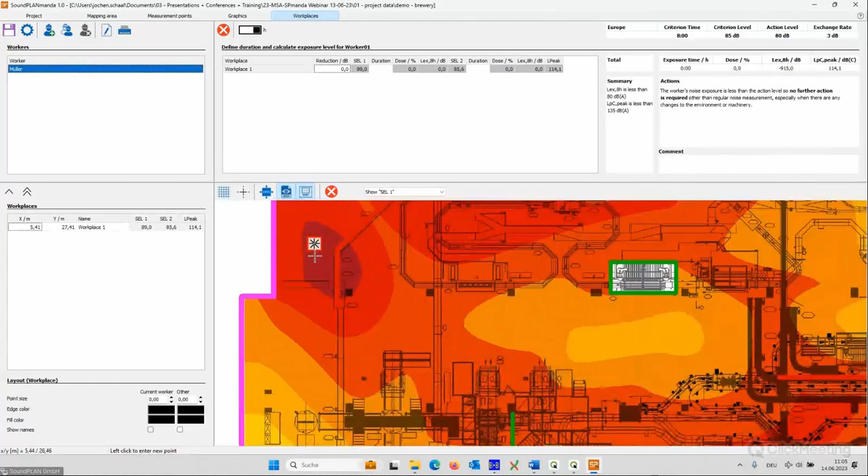So I created here a new working place, which is entered in the overview of the working places, and it was also directly assigned to Mr. Müller. So Mr. Müller is working at working place number one, and Mr. Müller is also working over here - so let's create working place number two.

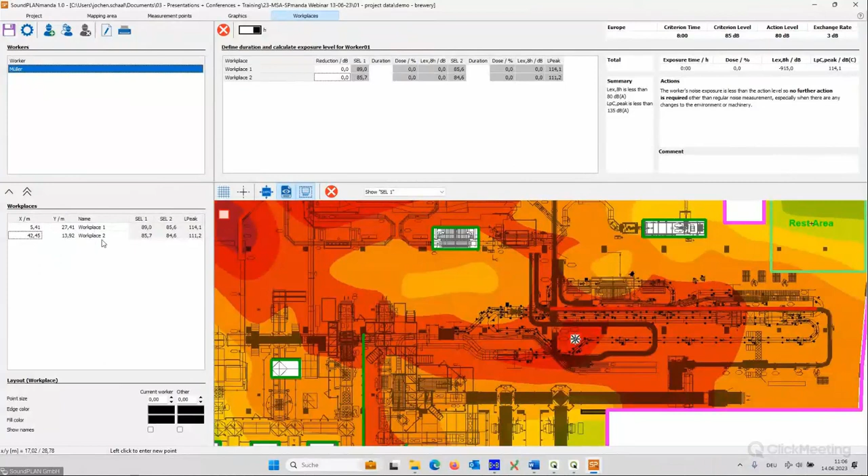Of course you could change the naming of the working places. I'm being a bit lazy, so I'll just leave it as working place 1 and working place 2. That's it.

After assigning working places to Mr. Müller, I have to define how long he is working at those places. This is a bit tricky because we have two different measured values. So I assume at working place number 1, during measurement period number 1, he is working 3 hours. At the same working place, but during measurement period number 2, he is working another 3 hours. Then at working place 2, he is only working during measurement period number 1 for another 2 hours.

Now you can see the software filled up the dose according to the measured value and the duration - the exposure level for this position, and duration for the next one. It also shows now the peak values for the two positions.

And then the total evaluation for Mr. Müller - the total exposure time, which changes again. Now you can see it's just 6 hours, so this is always changing - now it's 8 hours. The total dose is close to 170%, which is above the limit, and the total exposure level is 87.2 dB.

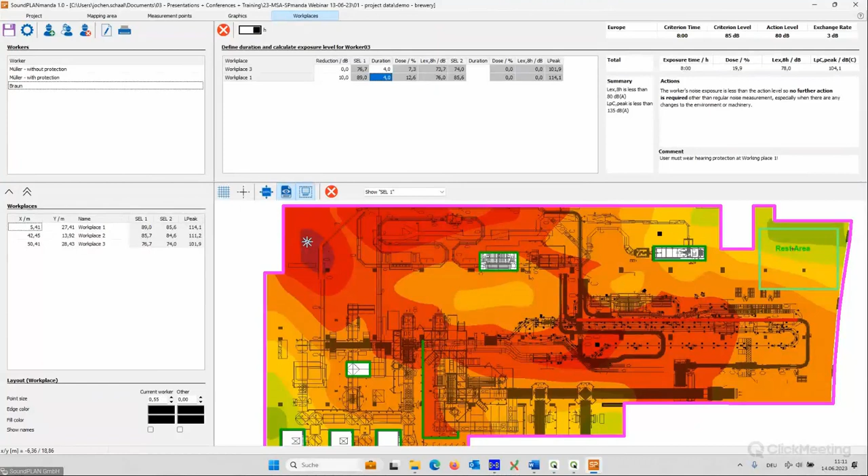In addition, of course, we have this possibility for graphical setups. So, for example, this would be the active working place, and you can see, okay, Mr. Müller is working here and here. The last one is small, which is not assigned. And Mr. Braun is working at working place 1 and working place 3, which are thick yellow, and the last one not assigned is small green. If you want to show the names, you can do that as well.

Tick mark here, and I like to show the names for the assigned working places, working place 1 and working place 3, to the current worker. So now it becomes very clear which are the current working places assigned to a specific worker.

Of course, the last step would be to print the results. To do that, you have first the option to go to the page layout. Again, we can choose the paper size, A4, A5, A3, letter, whatever. Portrait normally, so but it's let's say it's optimized for A4 portrait for the output.

You can have a company logo, which is automatically assigned. In the header and footer, you can have placeholders for project title, company name, total pages, but you can, of course, enter your own text again.

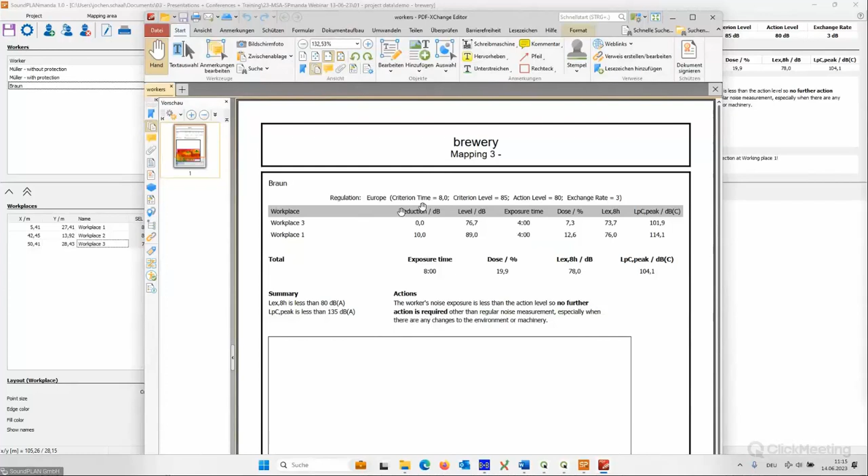And then we go to the print, also to PDF again. Desktop, workers. And I have to open the PDF. And there it is. I forgot one thing. I didn't select multiple workers, so it only printed the selected one. I will do it again.

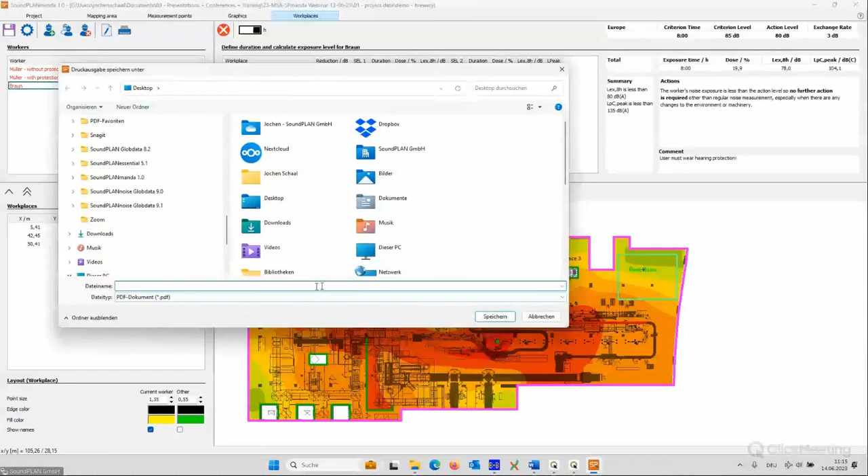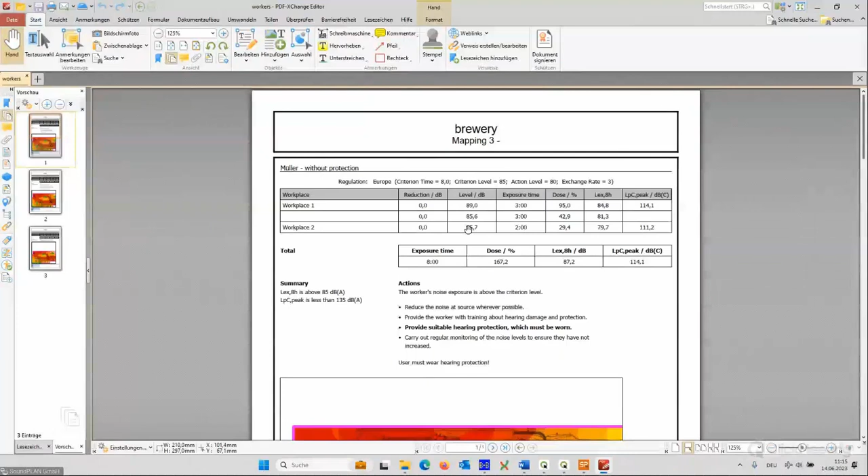Sorry. So the same as with the graphic sheets, you can select here a bunch of workers and print them at the same time. Okay, now you should see it. So worker Mr. Müller without protection. Here the assessment, the overview of the different measured levels, and the exposure time, dose, and things like that.

The total evaluation with the predefined actions and also your own entered text. And down here, the overview where he's working place 1, working place 2, and working place number 3 only as a green point because it's not important for this worker.

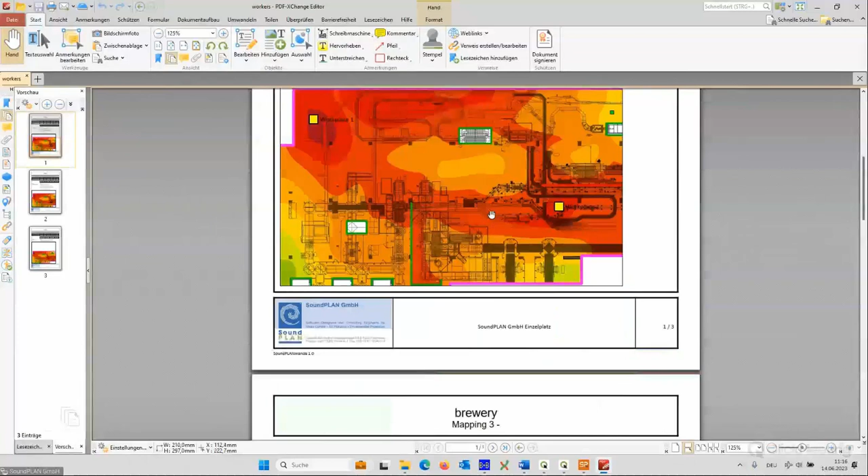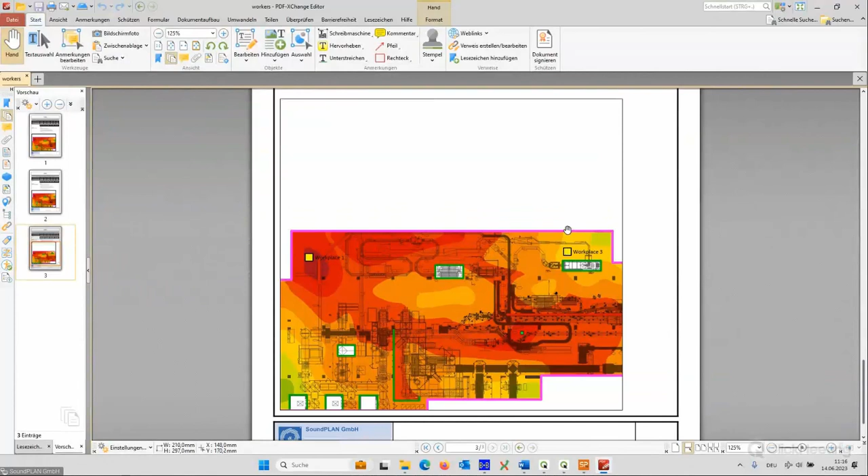Then Mr. Müller with protection, and you can see here the reduction due to the 10 dB hearing protection. Now everything is fine. And then the last one, Mr. Braun, and now it's zoomed to working place 1 and working place 3, giving you a clear indication where he's working, for which time, and things like that.

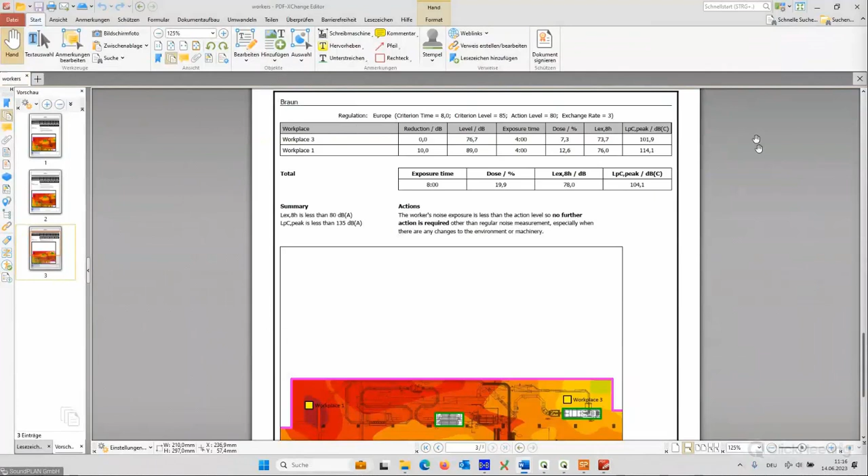Okay, so this brings me now basically to the end of the presentation.